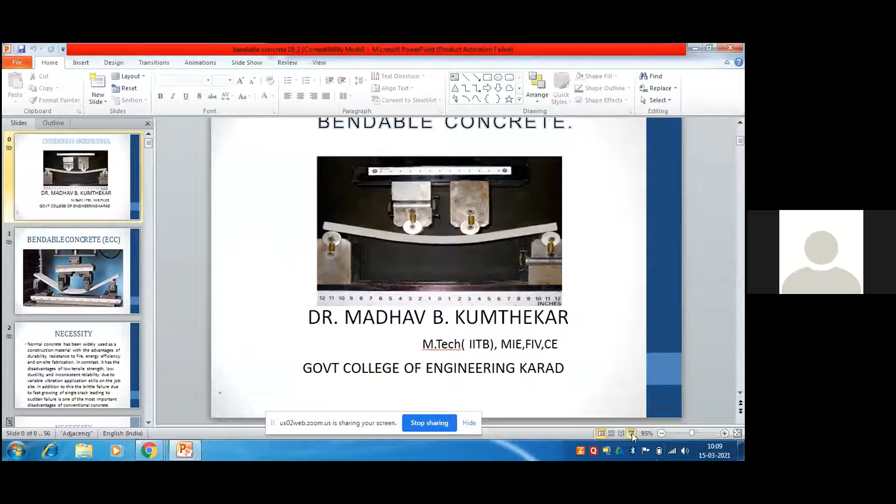Are you getting the screen? No, sir. Okay, I'll just check. Now? Yes, sir. Yeah, fine. I hope the screen is now clear. Yes, sir. Yeah, fine.

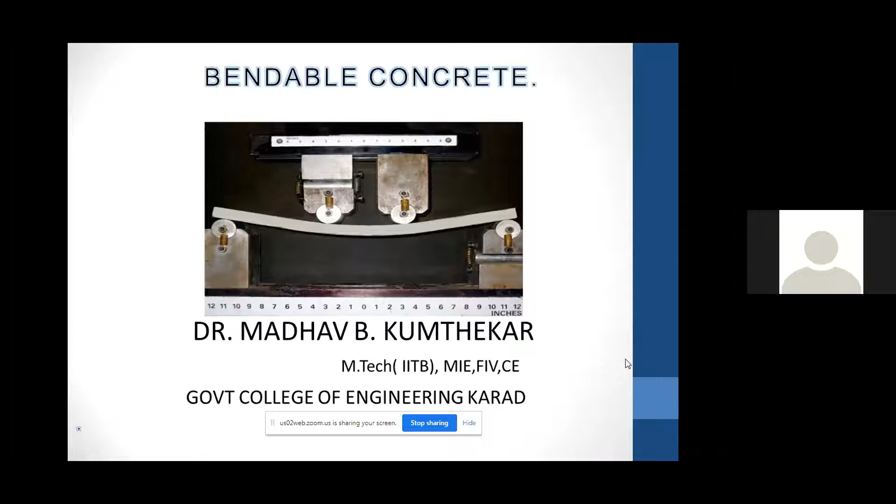Now, when you talk about concrete, you always find this material a typical material for construction due to two things. One, its typical behavior in two phases: the plastic stage and the hardened stage. In the plastic stage, it is purely like a plastic material, also called green concrete. It is deformable, not at all strong, and hence you can put the concrete in the formwork, dies or mold, for beam, slab or column, till it starts the process of hardening. This is its own advantage.

Second, the cost. Let us assume M20 concrete, commonly used in practice today. The rate is about 6,000 rupees per cubic meter. If you assume the density of concrete to be around 2,500, the rate is very close to 2 rupees 30 paisa per kg. But steel's market rate is very close to 50 to 60 rupees per kg, and considering the cost of welding and all, it goes up to 60 rupees per kg. So steel is basically 25 times costlier than concrete.

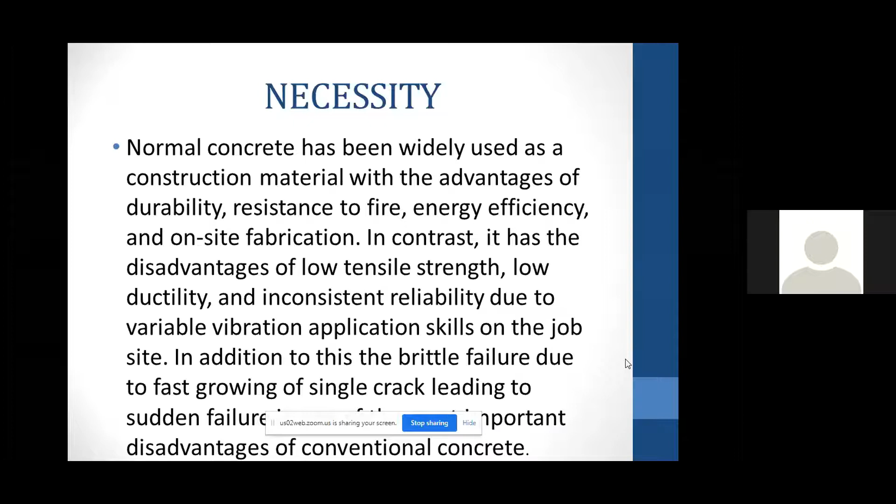Let us talk about this particular thing. What is the need of this? In fact, whatever pictures I am showing in this presentation, nothing is from the net. These are from the project which was done by me for L&T CC 8 to 10 years back, when the monorail construction in Mumbai was going on, moving across one web, a beam-like thing placed on the sides, and hence this project was referred to us at the Government College of Engineering Karad.

Basically the material is technically called engineered cementitious composites. Why, I will share with you, but commonly it is called bendable concrete. What is the need of this particular concrete? As I said, concrete is not at all a new material. It is known to human beings since long.

If you see Mohenjo-daro and Harappa, with perfect town planning, there was something called a gluing material. In fact, this was further developed in construction where they used concrete for long span structures, what are technically now called domes or arches. Of course, it is purely due to the structural behavior.

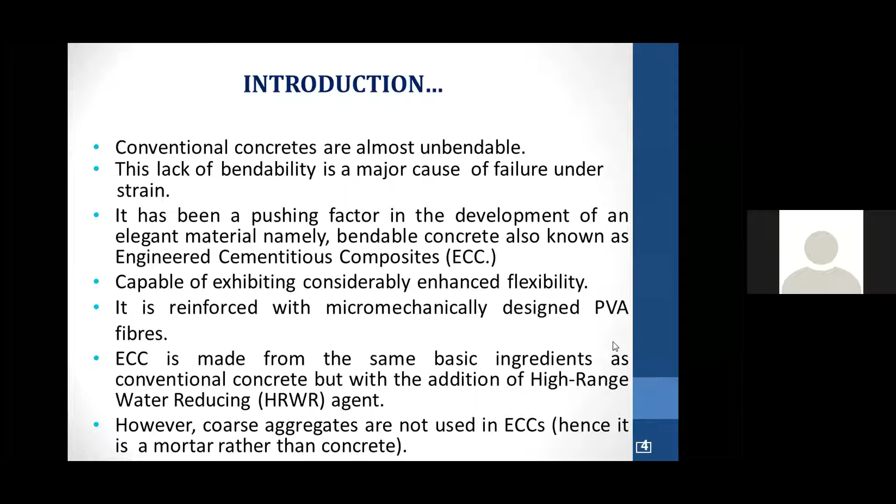ECC is made from the same basic ingredients as conventional concrete with the addition of high range water reducing agents, which are basically called superplasticizers. The only thing that I would like to share with you is that there is no coarse aggregate, and hence it is basically a mortar, and hence the name is engineered cementitious composites. This is the introduction. This is basically the need and relevance of this particular material.

Traditional concrete is considered to be ceramic, brittle and rigid. The main important ones are brittle and rigid. It cannot sustain any sort of shocks. It cannot undergo deformation. It can suffer catastrophic failure when strained in an earthquake or by routine overuse. This is a very common thing in the case of concrete. The catastrophic results, sudden collapses, bulging of the column, loss of the staircase unit, are purely due to this property of brittleness and rigidity.

Here, ECC acts more like a metal than a glass. What is the property of glass? When it is subjected to impact, it collapses. But what happens in the case of metal? If I apply the load, if I put it under strain, it will go on elongating for a very long time, and hence ECC acts more like a metal than glass. This is a more important statement. It is studded with specially coated reinforcing fibers that hold it together.

The meaning is, when I introduce the fiber, I am creating small gaps, nano gaps to be honest with you. These nano gaps provide the space, provide the volume to adjust the strain levels which are developed in the body of the concrete when it is subjected to impact. Second thing, these fibers act as crack arresters.

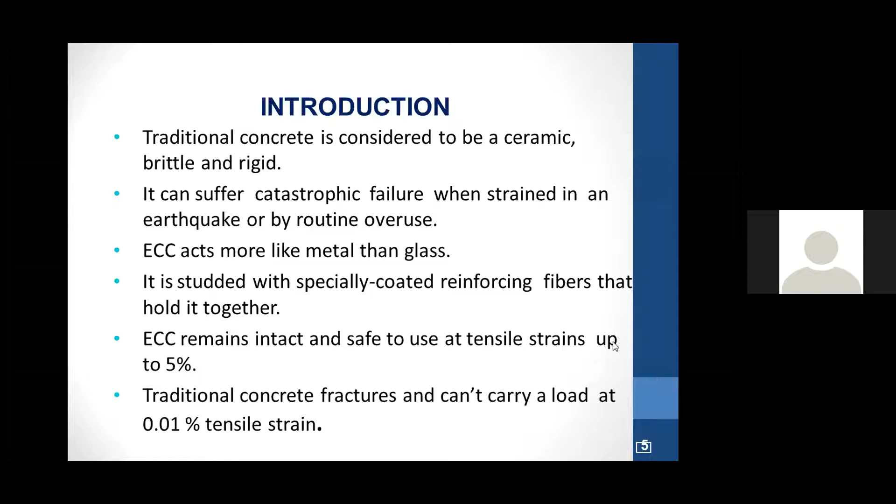ECC remains intact and safe to use at tensile strain up to 5%. In the case of concrete, it is not even 0.01%. You can understand, we say strain levels are extended, deformability extended by almost 600 times. That is the thing I'd like to share. Where the concrete cannot carry the load or beyond, this is the concept of ECC.

It is something like a cement mortar based fiber reinforced composite, FRC only, with superior ductility, most importantly almost 600 times the ductility of normal concrete in tension. And it is composed of regular cement. In fact, we have used regular Ultratech cement, sand, water, a small amount of admixture, mainly plasticizers, superplasticizers, and the quantum of fibers.

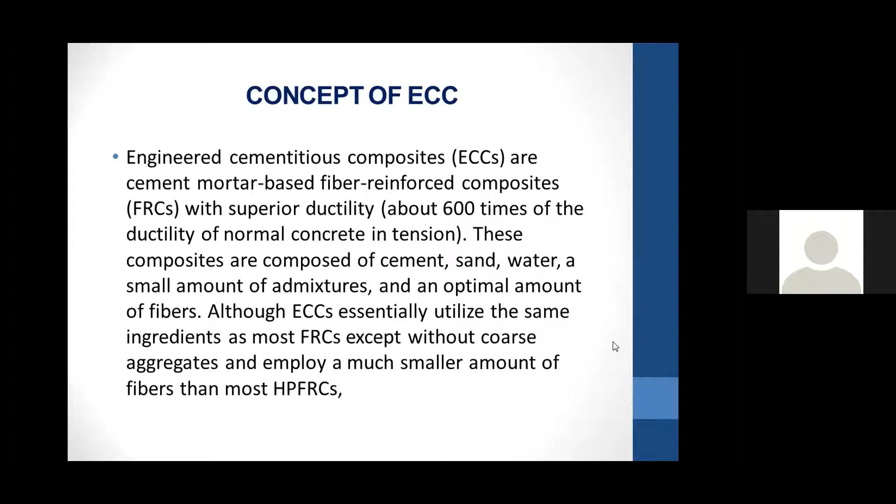But now, like 3G to 4G, the word super plasticizer has taken its place, where when I put that particular ingredient, it generates the charges. And as you are aware, like charges repel each other. The aggregate automatically gets separated due to this electronic charge. Electrically, the workability increases. One more point what we added is nothing but what is called as the fly ash.

Called as the pozzolanic admixtures. I hope you are aware about this particular word. The pozzolanic admixtures, they are inert material in nature. They are very, very fine. They are very, very tiny. And as you are aware, the shape of the material will always become round, spherical. And as they are spherical, they will act as the ball bearings.

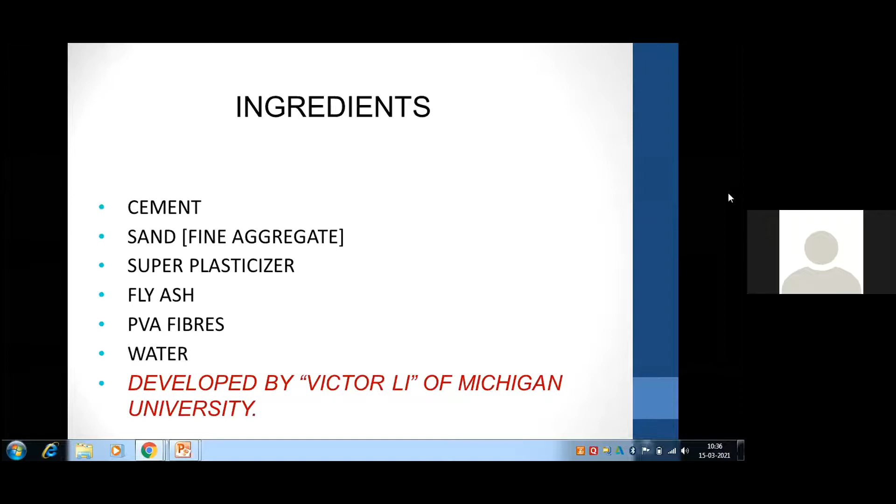Cement, conventional cement. Don't go for anything but cement. It will be more useful because it has better workability. Keep in mind the color of the cement; let's talk purely about ACC cement. I request many of you to visit this particular plant at Wadi. Next to it is UltraTech.

There are a number of plants of ACC; one is in Gulbarga, another plant is at Porbandar. If you take the cement from these two plants under the same brand ACC, the cement color at Gulbarga is the typical cementitious color, typical gray, say light gray. But if you go for ACC Porbandar, it will be slightly reddish because of the presence of iron oxide.

Many people will find they are advertising on TV, dancing with Birla White and all, JK. Friend, there is nothing like a white cement in the world. When I reduce these impurities very close to zero, I'm again using the words very close to zero. While manufacturing cement, conventionally we use coal as the burning material in the kiln. When we produce white cement, we use diesel instead; that is the only difference. The colorless cement produced without using carbon is called white cement.

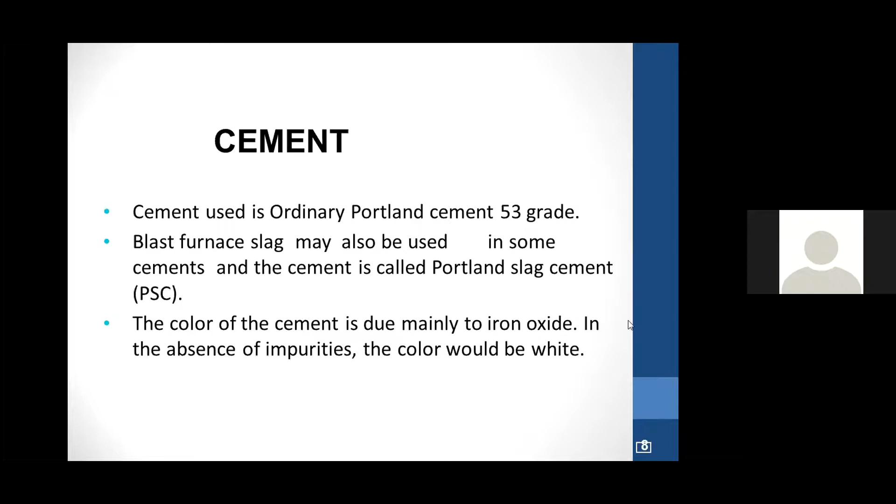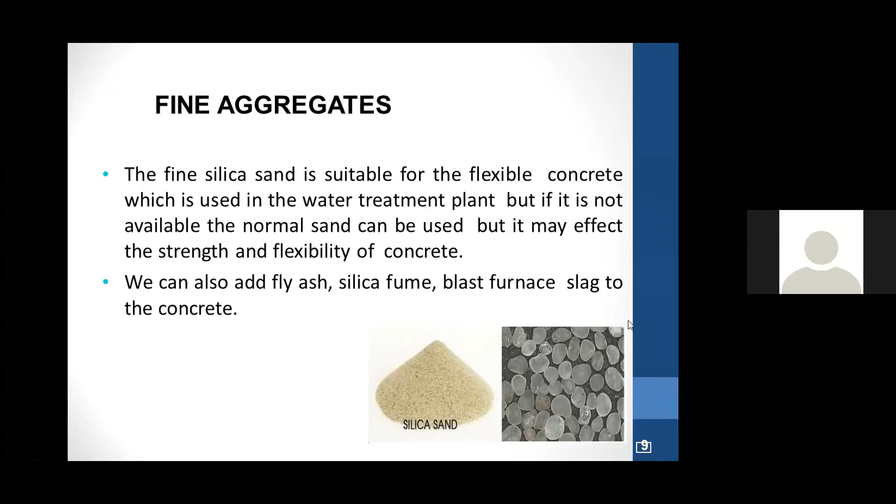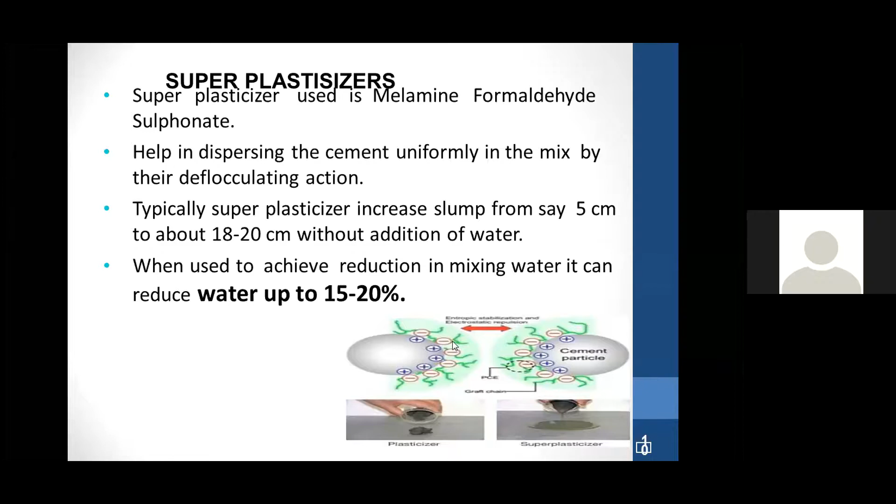And as you are aware, if extra water is present in the body of the concrete, it will bring volume changes. At the same time, you can find an increase in workability, normally measured by slump, of about 18 centimeters, without addition of any water. This is a beautiful thing for the structure.

The places like Karad, where I am now staying and coming from,

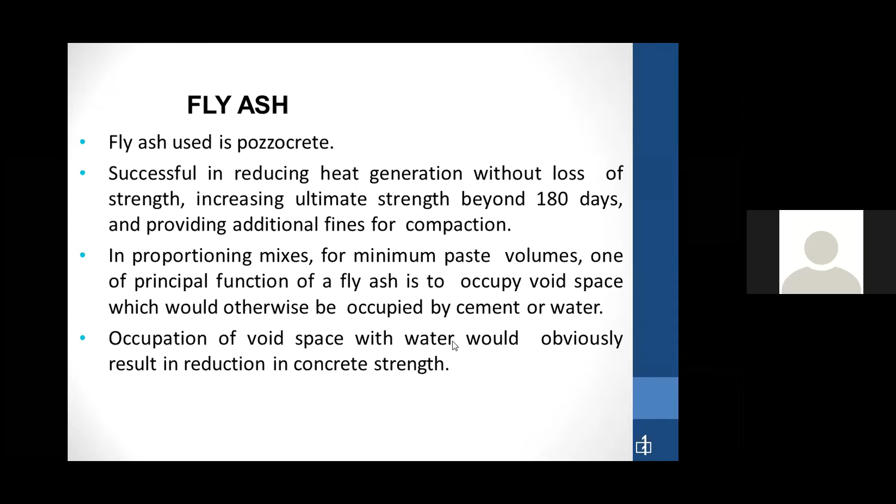That is the simple definition, and that is why using this fly ash is helpful, because the heat of hydration generated will be reduced to a greater extent.

These are the fibers, which are called polyvinyl alcohol fibers. Technically, we brought it from China at that time at 36 thousand rupees per kg. Now in India, in the last couple of years, many industries like Reliance make them at 1,000 rupees per kg. And hence, initially the bendable concrete was costly, 2 to 3 times.

Third, high modulus of elasticity. What is elasticity? Stress upon strain. Durability, tensile strength, and bonding strength with the concrete matrix are the major desirable properties. Strength and modulus of elasticity 25 to 40 GPa, which is almost 5 to 6 times. Second, elongation is 6 to 10%, which is more important, my dear friends.

When it is subjected to deformations due to so many other issues, this is the most important thing which contributes to the stability. And the tensile strength is between 900 to 1600, compared with conventional steel. As the diameter is small, they are colorless, they can be chopped, they can easily give high plasticity. It will basically take care of the weaknesses of the concrete whenever it is subjected to strains or deformation.